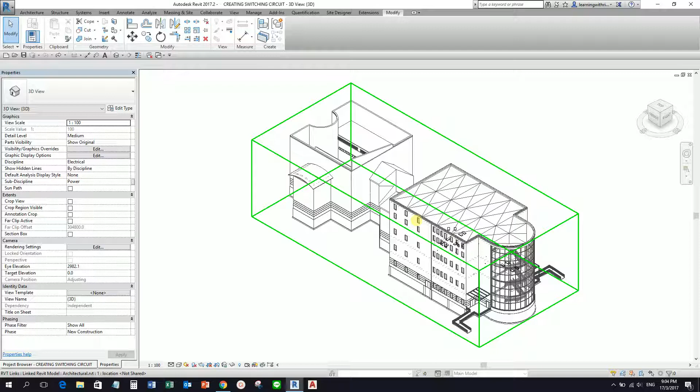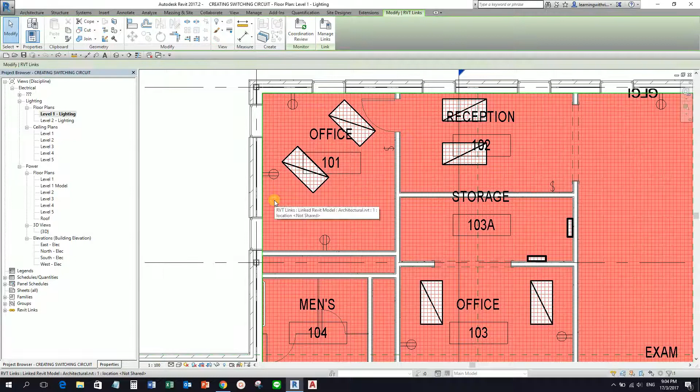I'm going to change my view to the Level 1 Floor Plan Lighting view, then hover my pointer over the face of the floor and press tab to highlight it, then right click and hide the view elements so I can see the floor plan nicely.

So I'm going to connect these lighting fixtures to this switch. To start, I'll select one of the lighting fixtures, and you'll see 'Create Systems.' I only have 'Switch' here to create, so I'll select the switch and then edit switch system so I can add this lighting fixture.

I'll select edit switch system. 'Add to System' is selected by default, so I'll select this lighting fixture. Notice the total number of fixtures is now 2. Then I'll select switch, and select this switch. Notice the switch ID becomes M Lighting Switches Door. After that, I'll select finish editing system.

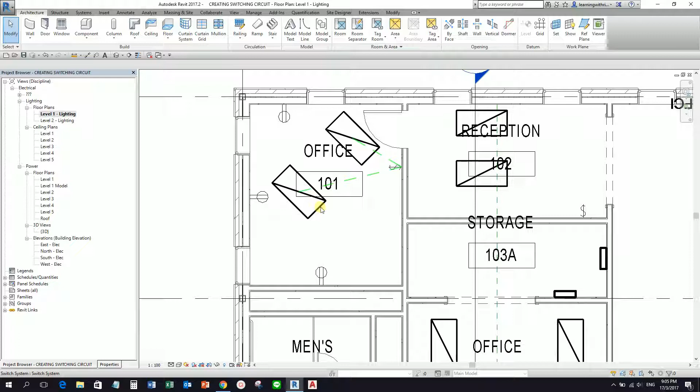That's how you create the switch circuit. I'll hover my pointer over the lighting fixture and press tab, then tab again. Now you can see the connection to the switch - go ahead and click that. This is now my switch system.

Let me repeat the procedure. I'll select the lighting fixture, switch, edit switch system. You just need to redo the exercise so you'll familiarize yourself with creating the switch circuit. Select switch, select this one, and finish editing circuit, finish editing system. There you go.

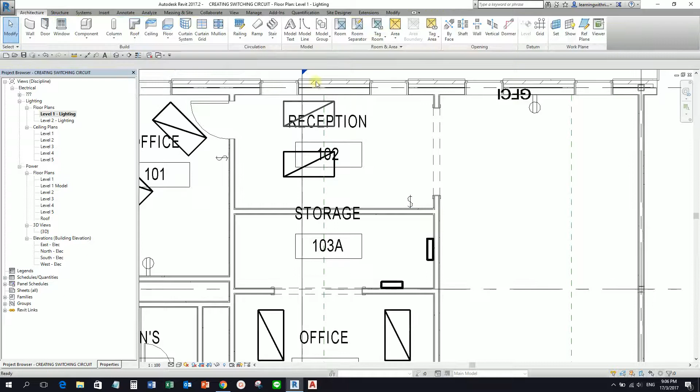I still have this room here, so same procedure: select one of the lighting fixtures, switch, edit switch system. Add to system is selected by default, so I select this one and this one. Then I select the switch and select this. Then I select finish editing system.

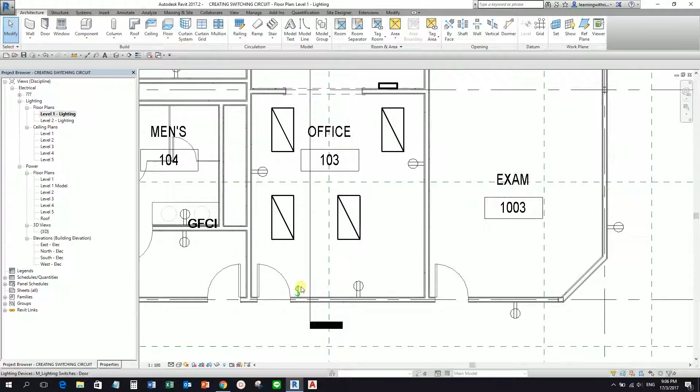Let me try hovering my pointer over the switch and pressing tab. There you go, and then I click. This is now the switch circuit. So where else? Here, okay, same procedure.

You can also select multiple lighting fixtures if you want. Then I select Create System here. These four are now included in the system, so no need to select edit switch system because from here I can already select switch. I click this one, then click this little guy here. Now it's connected, and I select finish, or modify, to finish creating the circuit.

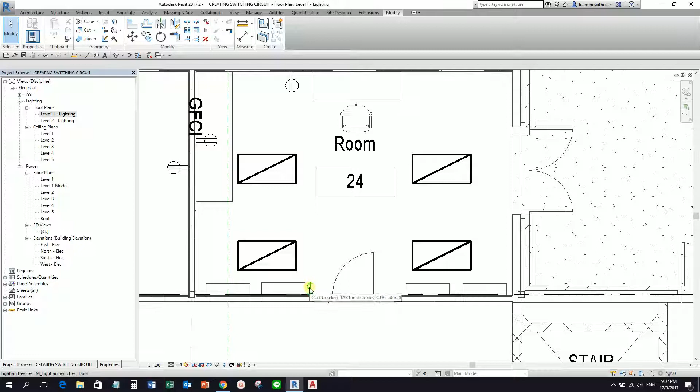I move my pointer over the switch, press tab, and click. As you can see, it's now connected. So that's it for this exercise. As you can see, it's not that difficult to create your switch circuit. Just make sure you've placed your lighting fixtures and switches correctly in your floor plan.